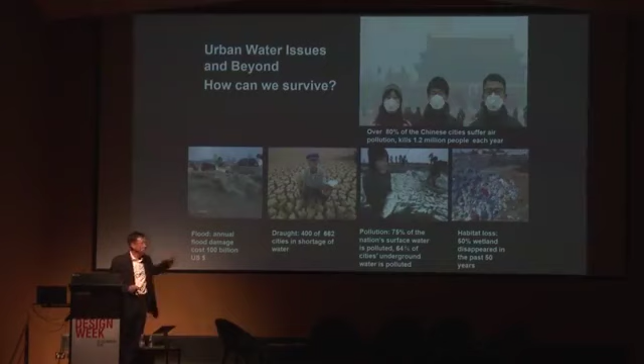75% of water is polluted. Two-thirds of Chinese cities are under the threat of flood. And again, these two-thirds of Chinese cities at the same time are under the risk of drought every year. So that's a problem. We have other problems beyond just water, but they are all related. So it's an issue of survival.

It's not an issue of beauty, not an issue of comfortability. It's about survival. But conventionally, we invest so much money, so much energy, trying to solve this problem by this kind of gray infrastructure, like I mentioned this morning, in Europe and particularly in China. In the last 4 decades, we consume 50% of world cement, 30% of steel, and 30% of coal to build all this infrastructure, to build all these cities.

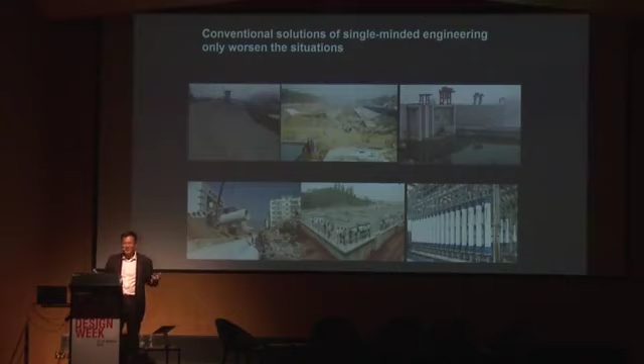And we say, I will quote, this is all from Western technology, industrial technologies. But we forget this - what we have built up in the past 5,000 years, the wisdom we have lost. We have forgotten the art of survival and the wisdom of living with water. And this kind of wisdom has been gained through thousands of years of experience of life and death.

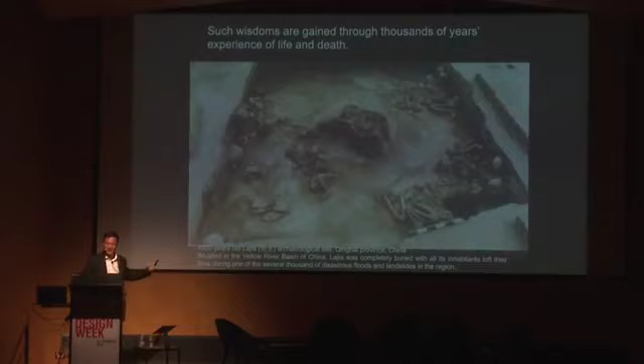This is just one of millions of these cases in China. 4,000 years ago, a whole village was buried under the flood, under the mud. The whole village. And at the moment when she, the young mother, was buried under the mud with her baby in her arm, she raised her head, calling for help. As we today, many still have the same gesture, calling for help, calling for God for help.

And this God was nobody else but the landscape architect, the planner. And as the planner, who was the first king selected or elected by the people, becomes the first king. He knows how to plan, how to divert water, and how to develop the city to avoid the flood, and select the right crops to grow at the right place. His name is Da Yu, the Great Yu.

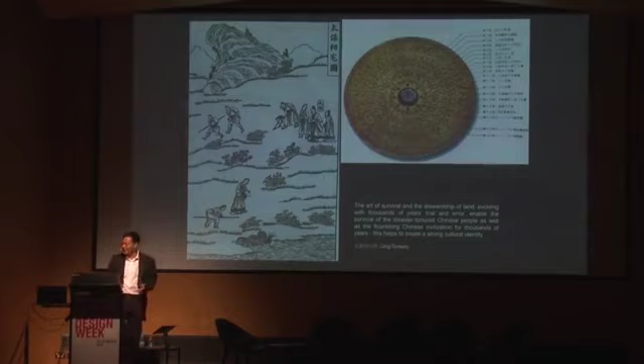And because of this, as mentioned, the life and death experience, we were able to invent all these technologies, including this compass. The compass in China was invented about 2,000 years ago, and never used for navigation. Today we use the compass for navigation, but the Chinese invented the compass for siting, for selecting the safe place to live. That's why the whole nation, the whole landscape in China was carefully planned and designed to locate where to allocate the cities, the villages, or even the tomb, the graveyard.

So that they can survive. Even in the Yellow River Basin, where the river in 2,000 years wiped out the whole China's North Plain, the Central Plain, all the cities were able to adapt to this kind of flood. So the cities are built in the water, or let water go into the city. Live with water, you can imagine, to be able to survive.

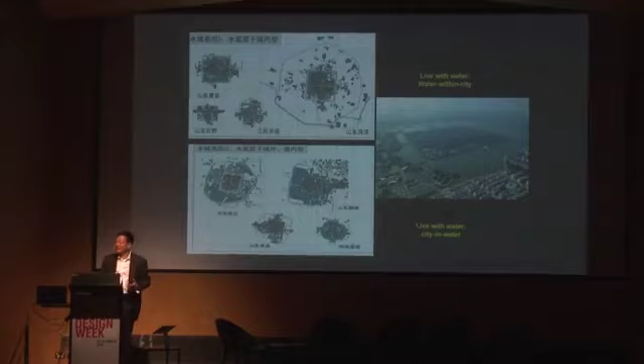And also because of such an experience, the knowledge being built up, we are able to build engineering, but prudent engineering, so that we are not offensive to the water, but at the same time able to use water wisely. So this is a system, all man-made.

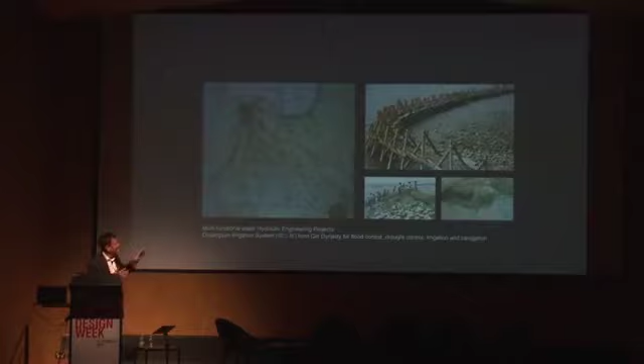I like the idea of designing nature, designing ecologies, designing. These are all designed. 2,000 years ago, the Chinese built this dike system, using very simple technology, bamboo and gravels, to divert water to irrigate the whole basin in Sichuan basin, and everywhere. This is in Shanxi province. You can see how the water is distributed.

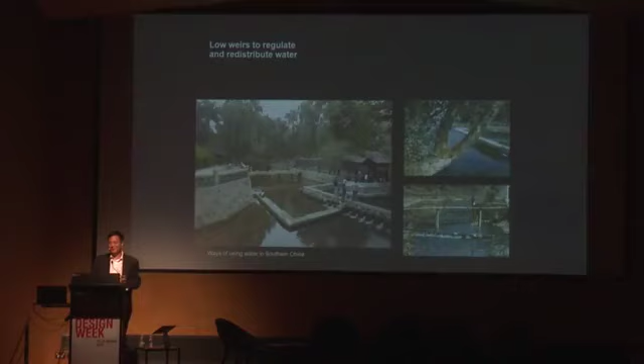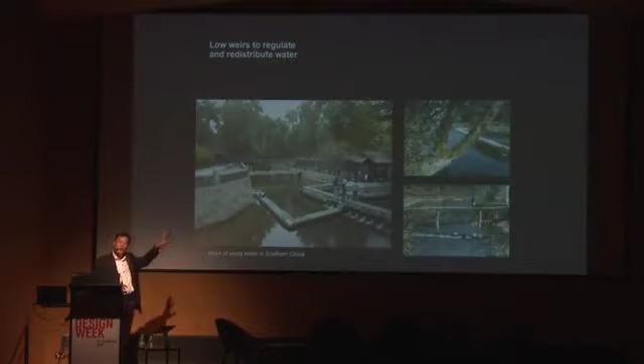Water is a meager resource in China. We have only 8% of global fresh water, but we have 20% of the population. So on average, China is overall in shortage of water. Here you can see how the water is managed, diverted, distributed equally among individuals, among the people.

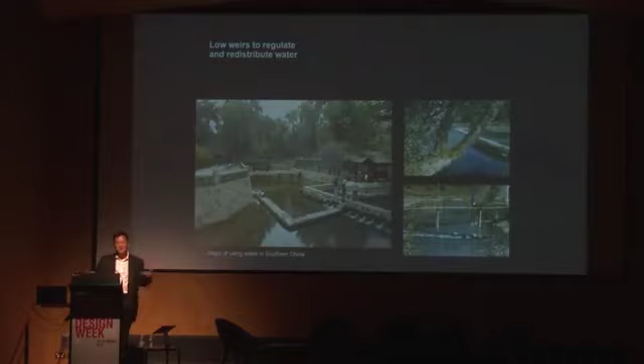And we have developed this whole peasantry, or farming skills. You can see how the water is retained, irrigated, used for irrigation, and able to be used around the season. We have monsoon climate in China, basically dominated by monsoon climate, so we have 3 months of rainy season, and the rest of the time we are in shortage of water. You can see how the water is retained, stored, and recycled. So it becomes productive. The whole landscape becomes productive.

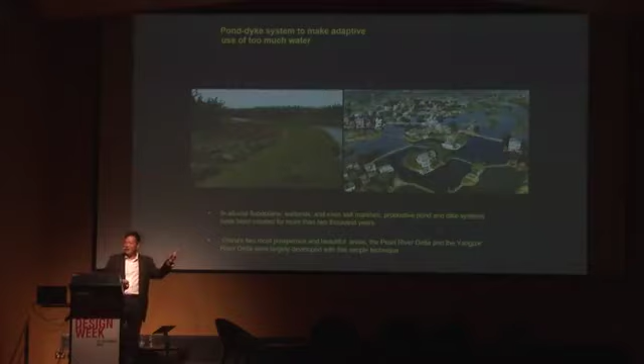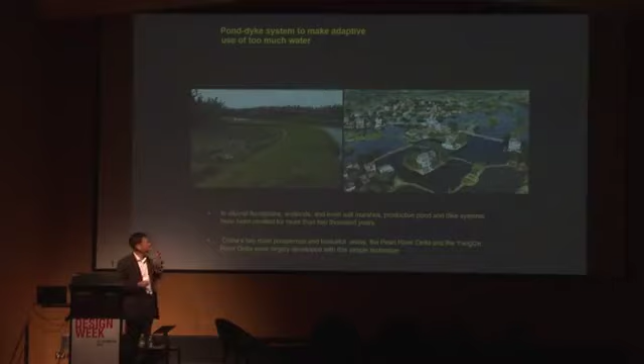Using a very simple pond and dyke system, we dug out the dirt to create a pond for fishing, for cultivating fish, and created a dike for mulberry, bananas, sugar canes, to make it productive and safe, secure to live with water, and to be beautiful. We also have the knowledge to carefully select plants. You can see dry crops, wet aquatic rice and bananas, to live with water and to rotate according to the season.

Monsoon season, grow rice. Dry season, grow sugar canes. It's adaptive to this kind of climate. And fertilizing - we developed this wisdom to deal with fertilizer, waste of human beings and domestic animals. This fertilizer goes back to the field and the whole village is cleansed through the process of fertilizing, so that the nutrient will not go into the water. This nutrient today we define as pollution.

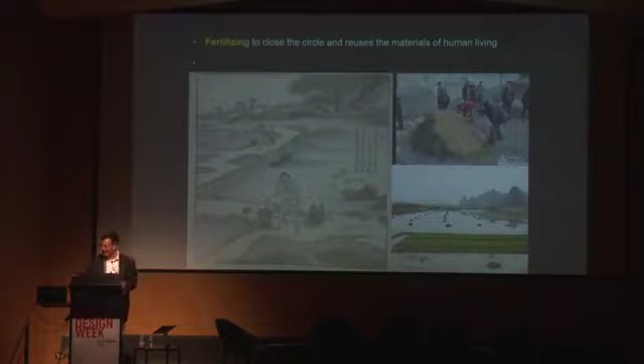So that's a story I remember from childhood of how we can solve today's urban problems, urban issues. So it's time now to revive and upgrade the ancient wisdom of living with water. Now that means we need to rebuild this solution, rebuild this system. It's a symbiotic solution to urban water issues.

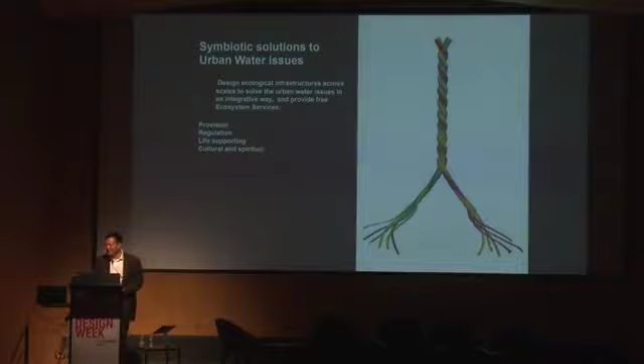Create green infrastructure - today all the speakers mentioned green infrastructure. Now, the green infrastructure is a structure. The key is a symbiotic, integrated, not monofunctional engineering solution, not a single-minded solution. Integration - that's the key, that's the key word, and that's the key for sponge city.

You can see the green sponge is basically building the green infrastructure. A sponge has no visible structure. Imagine the sponge is resilient, made of small, non-structural holes. So you don't see any connections, but deep inside, it's totally interconnected. That's the idea, and now it's being promoted nationwide by the president. You can imagine when the president says we're going to build a sponge city, what will happen. Right? That's a sponge city.

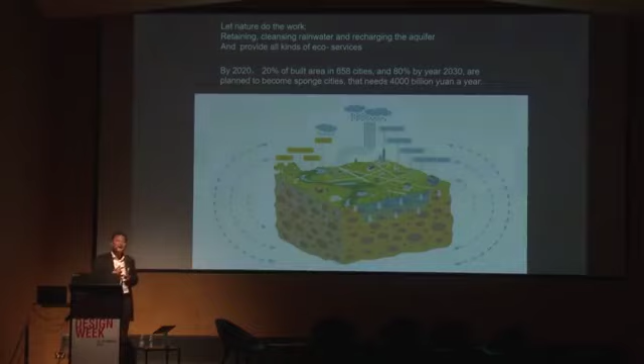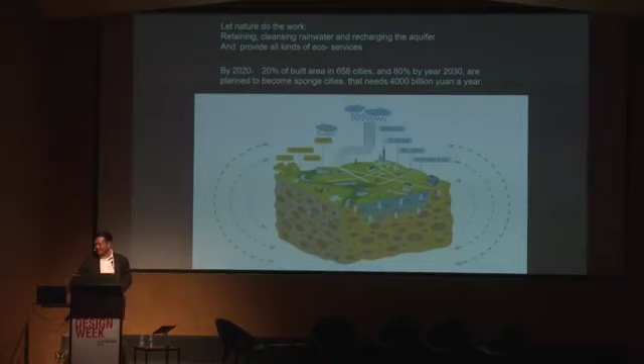Basically, 3 key meanings for sponge city: retention, cleansing - now that's important, cleansing in China is particularly important - and permeable, permitting recharge of the aquifer. That's the 3 key meanings of sponge city.

Myself is one of the first players of this keyword, sponge. This is a book, The Theory and Practice of Sponge Cities. And this is a system. I like the system, top-down system.

And we talk about bottom up. This morning we're talking about bottom up. Now, the first part I'm talking about top-down system because it's functional, it's very efficient, particularly in China. I remember the first landscape architect was the king. So if you become king, you'll be able to top down the idea of sponge city.

This in the past 20 years is a Turenscape project in China. In 200 cities, we're practicing for 20 years, and we built basically more than 1,000 projects. It's everywhere, almost everywhere in China.

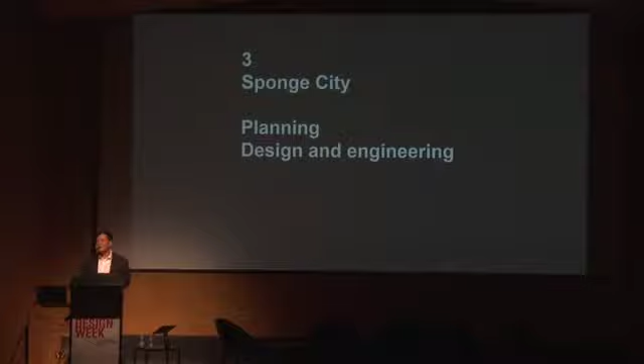But I want to talk about just 2 strategies. How can we develop the sponge city, not just in the city, but nationwide? As I mentioned, it's about the continent, it's about the globe, it's about the whole nation. How can you retain the water, keep the water, clean the water, and recharge the aquifer? Because we already destroyed the whole hydrological system, so we had to fix it, but fix it at national scale. This is across the scale - large, medium, small - rebuilding the ecological infrastructure.

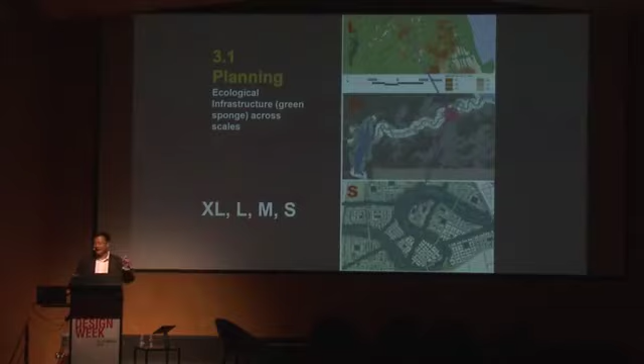So the first is planning. We need a plan tool to solve the problem. And this must go to the policies - the national policies, the city council policy, and certainly the provincial policies. Now this map becomes part of this national policy. We did research first to see how a national sponge system, I call it a national sponge land system, can be built into our national landscape.

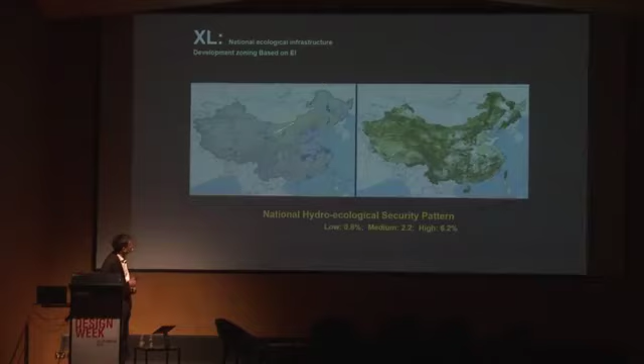Imagine the first map shows you that - look at this water system. We analyzed it, and we found that we only need less than 1%, 0.8% of the land to deal with annual flood. So if you just let less than 1% go to nature, to water, you virtually have no flood. That's annual flood, maximum, worst situation. We are talking about climate change - the worst situation, you only need 6% of the national land to give to the water. So that's a big picture. It's affordable - dealing with climate change or dealing with a national scale flood is affordable.

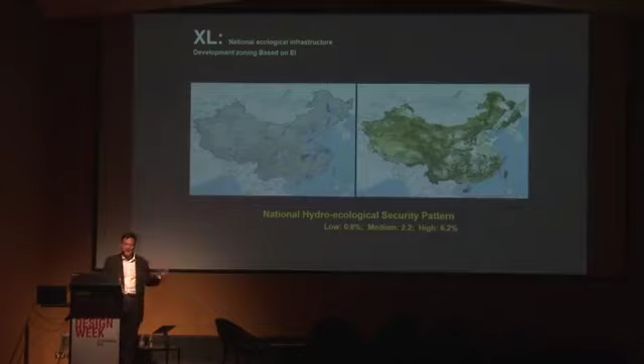So that's why we developed this national sponge system. All the dark green area is a red line - we call it red line. Now it's become national policy to draw a red line at national scale, which means you should keep those green spaces in order to keep the nation secure in terms of flood. And the light green is a resilient place - there's a place which you have to deal with water, it can be both, it's a kind of buffer area. So this is a national picture. You can see if you keep those areas, you can keep the storm water as much as possible, and you can avoid all the flood which we are fighting against with so much energy, so much concrete. We can be totally free if we can keep those.

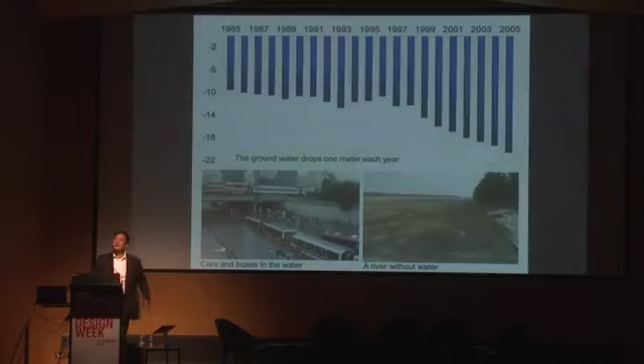At a regional scale, this is Beijing. In the last 40 years, Beijing expanded 7 times. You can imagine, Beijing expanded 7 times, and the groundwater dropped 40 meters - almost 40 meters the groundwater dropped. So all the rivers are dry. But the streets, you see, become rivers during the rainy season. It's very ironic.

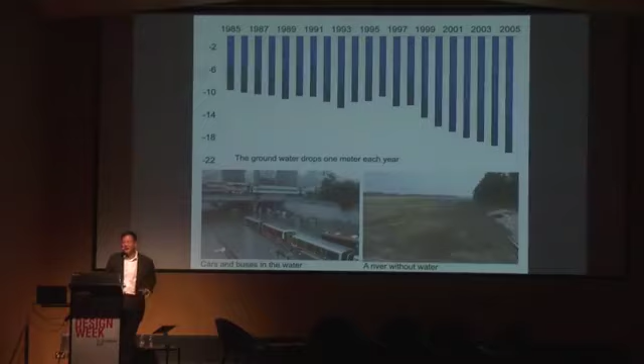And today, people are talking about building thicker pipes, storage tanks - I like that very much, thank you for the morning talk - because they want to learn from how the Europeans built the city, how the Japanese built the city. Under the city, they said Japan has a huge storage tank. So we're going to build a huge storage tank - totally a mistake. So we say no. Gray infrastructure will not solve the problem, particularly in the monsoon climate. That's why sponge city has been put on the table.

2012, 79 people died on the street in Beijing city, the capital, because of urban flood. People died on the street, in the cars, because of flood.

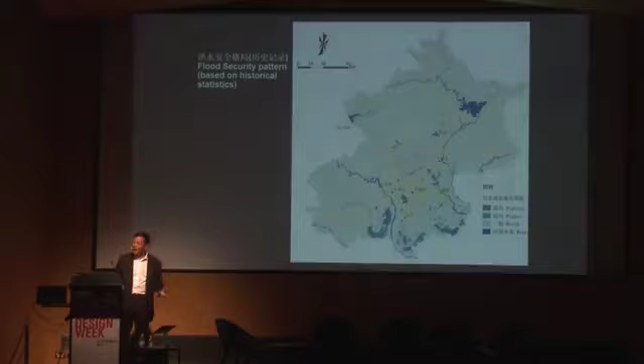So we analyzed where people died in these places, and historically, these places were supposed to be wetland, supposed to be given to the water. So the planning was done before the flood, actually.

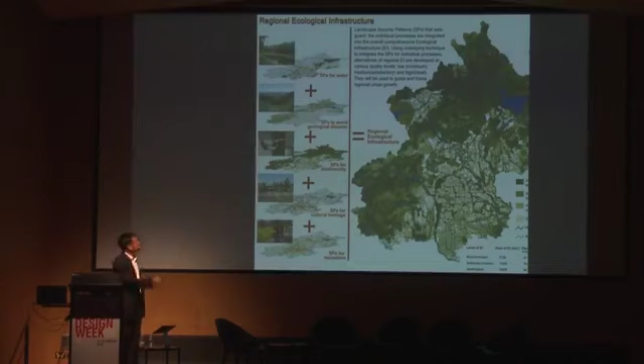So we did the sponge city concept, saying we need to integrate stormwater management, habitat, trail, bicycle system, pedestrian trail, and cultural heritage, and integrate them together to create this green infrastructure. Sponge city is not just about water. It's about an integrative solution to all these cultural and environmental problems in the city, including the pedestrian system, which should be integrated into this sponge system.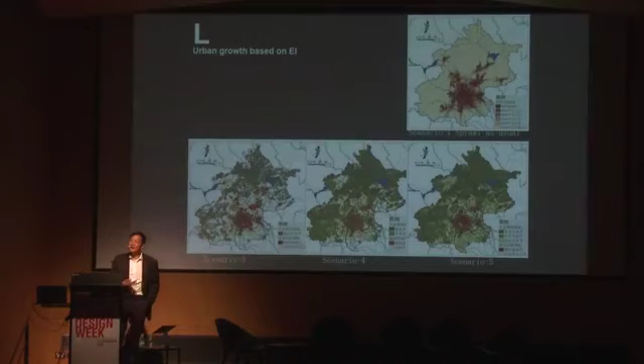So the sponge system is a resilient solution overall. Instead of exploiting the city like what happened in China in the past four decades, we propose that the city should be built upon this green infrastructure, or the sponge system.

At medium scale, now this is a built project. I want to show you this is about 10 square kilometers in size. It was designed in 2008 and built a couple years ago, and it's been tested by the flood.

So instead of following the conventional model of leveling the ground and building pipe sewage and drainage systems, we say that we don't need a drainage system. We don't need a pipe system.

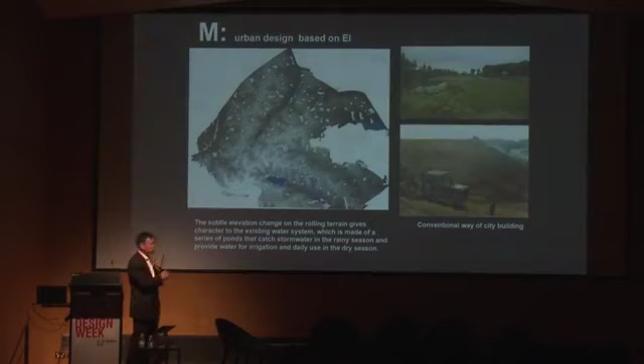Because look at this map, all the pond system is already here. Farmers did it. For 2,000 years, the farmers dug out all these ponds to regulate the drainage, the water system, in the monsoon climate — keeping water in the monsoon season and using it during the dry season to cultivate the landscape. Now that's the heritage.

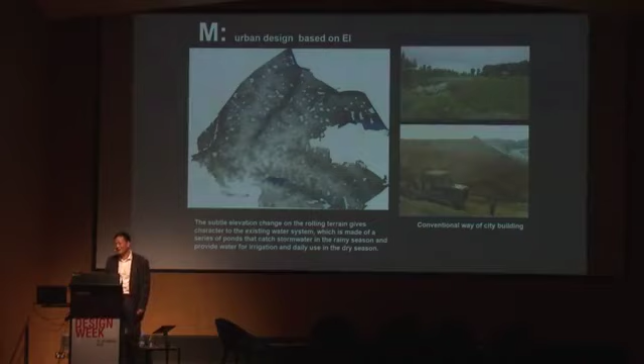So if you keep the heritage, you can virtually avoid all this urban flood in the city. So we integrate this into a new system, but based on the ecological or existing heritage system.

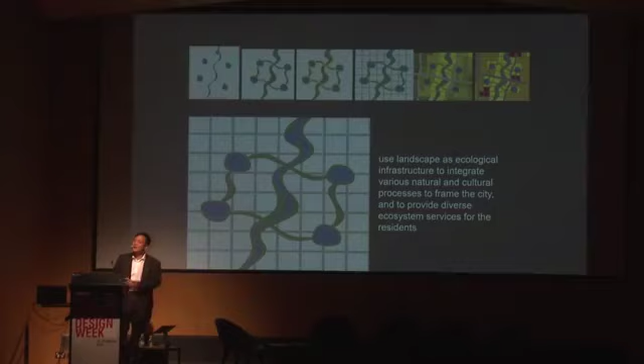So the existing ponds are linked with pedestrian greenway systems. I call it negative — we can reverse the whole process. Before you level down the ground, we build the green infrastructure first, then decide where to use the land for development.

And build the city without drainage pipes — no drainage pipes, only landscape as a drainage system. The first grade, the second grade, and this whole river canal system become part of the village, part of the city.

Back 2,000 years ago, the Chinese classics book about farming says that if you have 20% of the land for water, you will be safe, and you will get prosperous before you cultivate the land. Now that's the rule, based on the experience of farming.

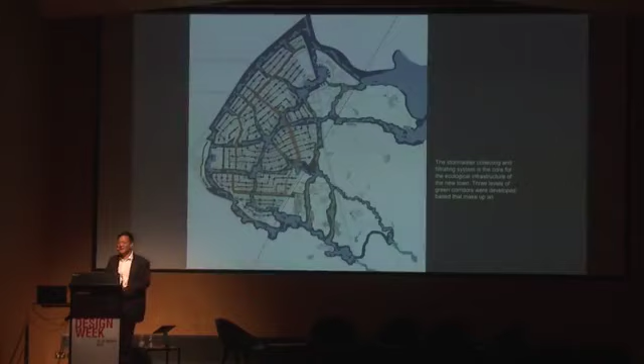And today the Chinese code says that the minimum green space in the city should be 30%. So we have 30% green space to allow you to build the sponge system. So we didn't cost more land, right? It's within the framework of the legal system.

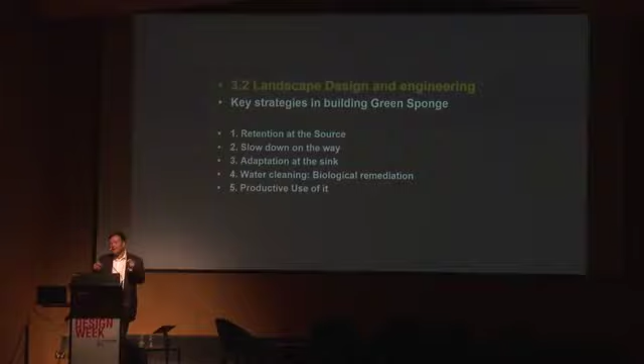No drainage pipe, and it was tested last year, because last year the whole city of Wuhan was almost flooded by this storm water, and this area was safe. We tested it. So again, it's ancient wisdom, but it's been upgraded and it solves urban problems.

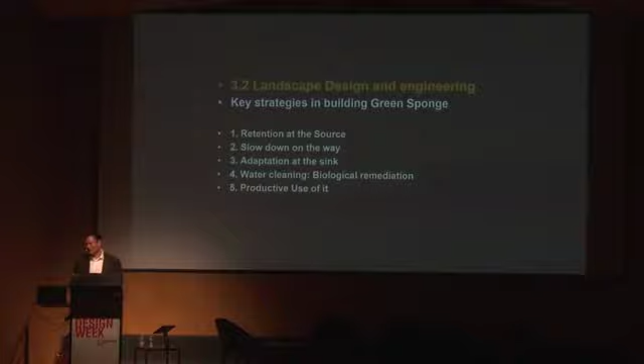Now that's about the planning. The second part I'm going to discuss is engineering, the design, and some key strategies in building green sponge.

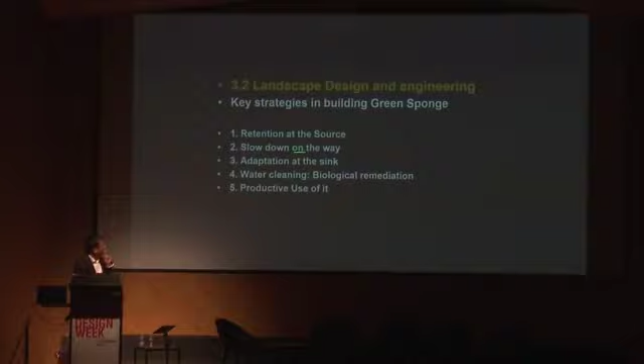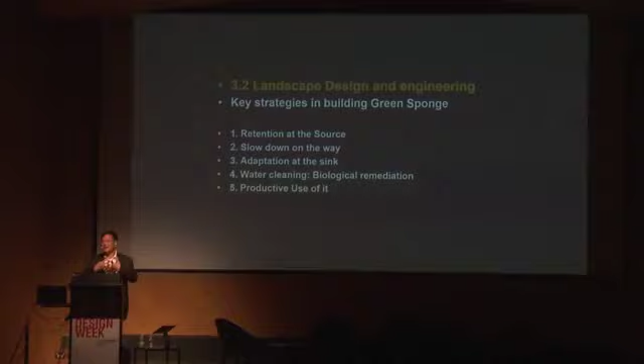Four points: retention, slowdown, adaptation, cleansing — biological cleansing — and productive use of it. These are integrative; they should be integrated, they should happen at the same time. So the first strategy, or first case, I'll show you how the green sponge solves the problem at the source, at the beginning. Create sponge in the city.

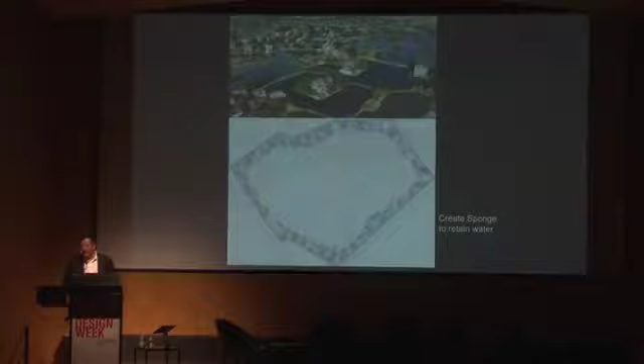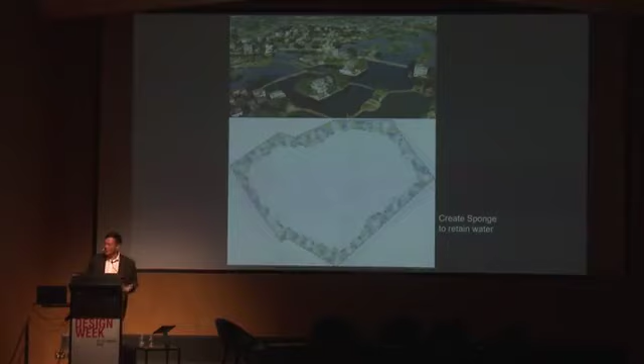Retain it. Instead of a piece of land, we just retain it, keep water, simple. And we learn from nature. As I said, when a marsh happens, you create a pond and a dike and create a really safe, secure sponge system. That's the land we have in Harbin in North China. It's about 33 hectares, a huge piece of land, surrounded by all this development.

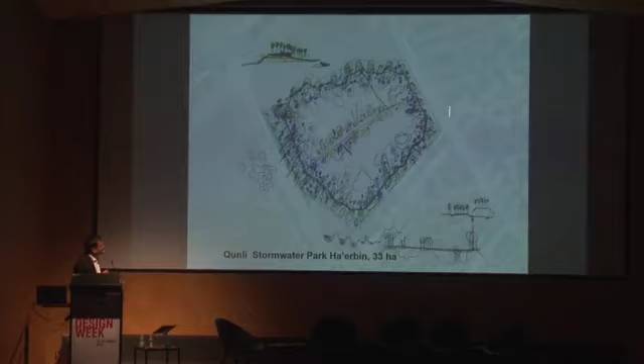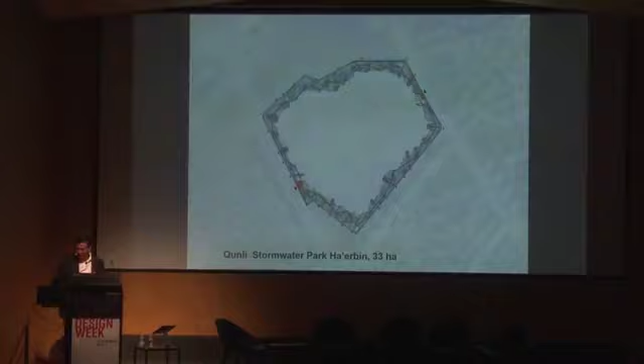They want to build a park. So what kind of park? This park, we say we need only do this periphery area, and they use cut and fill strategy. Cut and fill strategy, simple. And put people above it, and let water go into it. So it's a filtration process.

Cleanse it. So there's dirty water and clean water, and it goes into the middle. And we just leave the middle part, the lower part, alone. Like nature takes its process, nature works. So that's a map, and that's the rendering you can see.

That only needs one machine. It's simple, dug and piled. So we create this kind of landscape. Pond, mound, dike. So put a tree on the mound and let wetland plants evolve in the pond.

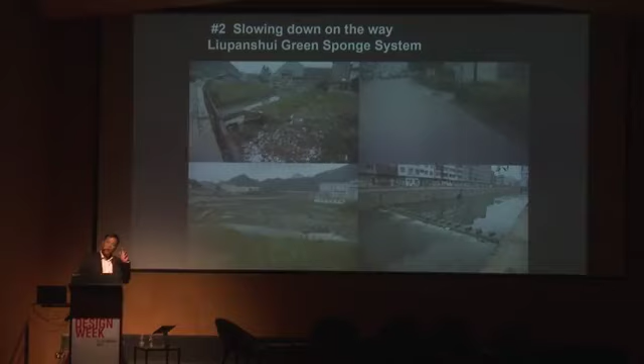So what about the second strategy? It's about the slowdown process. All modern monofunctional engineering tries to speed things up - you can see several cases here we discussed this morning. All speed up because it's easy to calculate, easy to build, and really functional, fast, efficient. But that's only one function, right? So we want multifunctionality, we want symbiotic solutions.

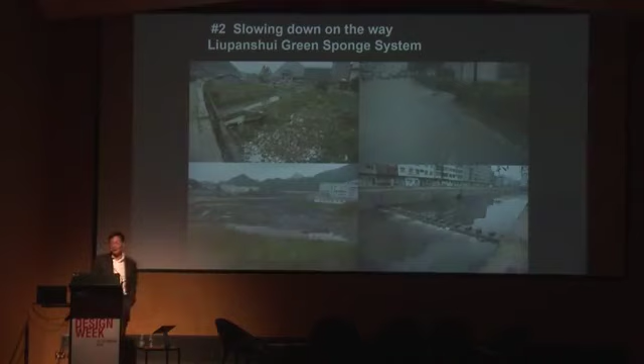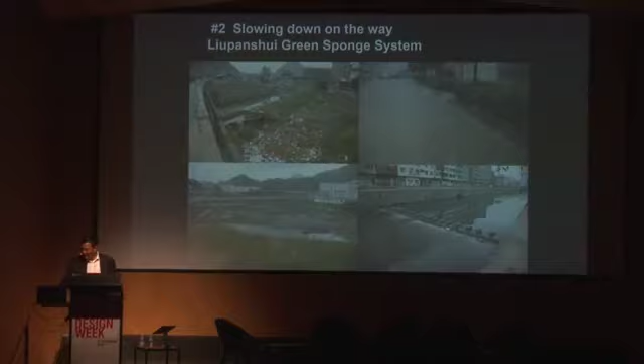This situation is in a city about the same size as Copenhagen, 6.6 million people in southwest China. Polluted, channelized river - you can see stormwater issues, wetland being destroyed. So we say that we want to slow down the water process, recover the natural system, but at the whole system level, including the rivers that run through the city. We recover all this drainage system, green it, and also put sponge wherever possible, wherever the water will merge, built into the communities. So that's the whole system.

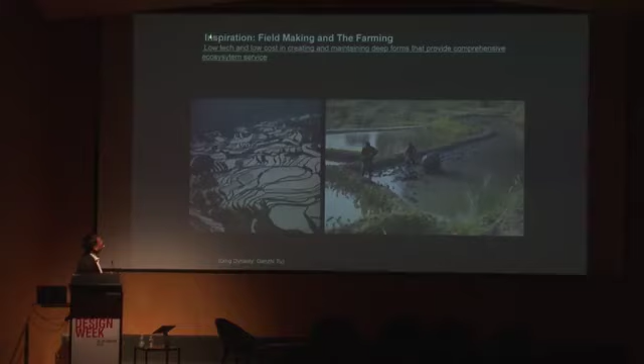This whole idea about sponge is to create a resilient water system, a hydraulic system, but it's a system. And they use very simple ideas, simple technologies, field making and farming. We learn from this - as I said, we know how to do it, and we can do it very cheap, very easy. It's art, it doesn't have to be precisely scientific. It's just common sense, and it doesn't have to really use any machine. It's very simple, yeah? That's the idea we got lost.

You can see, look at this globally. Southeast Asia, when you look at Mexico, when you look at any ancient culture, the whole globe's surface has been changed by farming, right? And this is a technique - it's so simple, cut and fill. Just cut and fill, using very simple energy and power, simple tools.

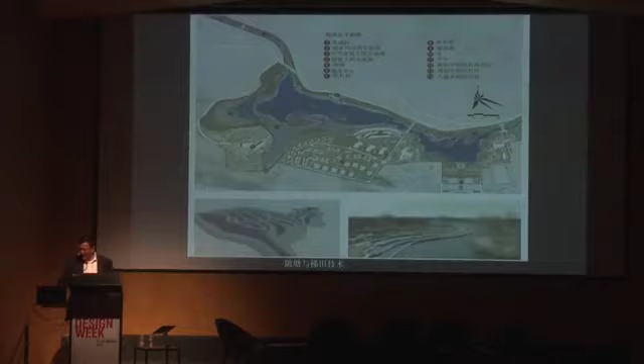So we learn from that, and create this terraces, pond and dike system, and transform this whole landscape in the city. Remove all the concrete - you can see that this was built based on this engineering idea. Speed up, so we slow down, transform - you can see, and fish come back.

It's just so quick - just 2 years' time, fish come back. And this was before also. Channelize the river system, speed up water, and we slow down again, turn the river into a pond system. This was before also. So speed up river, polluted soil and garbage dump, and we introduce this pond and dike system.

Connecting hundreds of ponds, turn the speed river into a slow wetland system, and we basically solve all the problems - pollution, retention of water, mediating and regulating water from monsoon climate to dry season. So we clean this up, you can see, and also make a beautiful park, used by thousands of people every day. So that's the second solution: slow down.

When you slow down, then nature will take over. Nature will have the opportunity to solve its own problem, to remove all the nutrients and to revive this habitat and the vegetation. So the third strategy is to adapt.

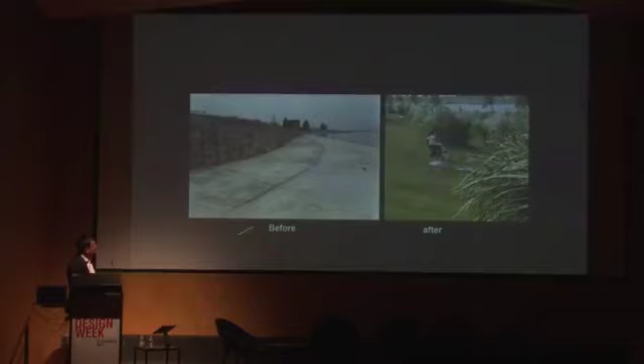I want to show you how, as we discussed this morning and afternoon, we have all these cases. This case is again based on the understanding of water force - 10-year flood, 20-year flood, 50-year flood. Nature doesn't need many places, right? As I said, only 0.8% for annual flood, or 6% for 100-year flood.

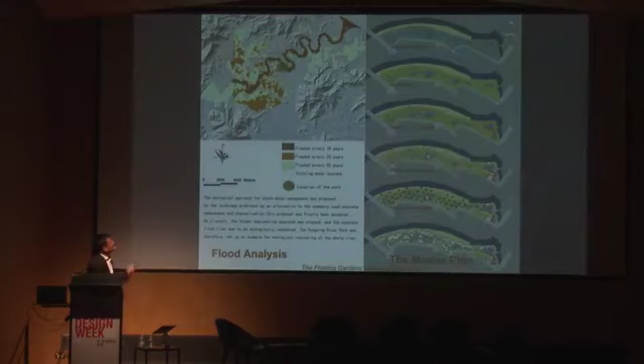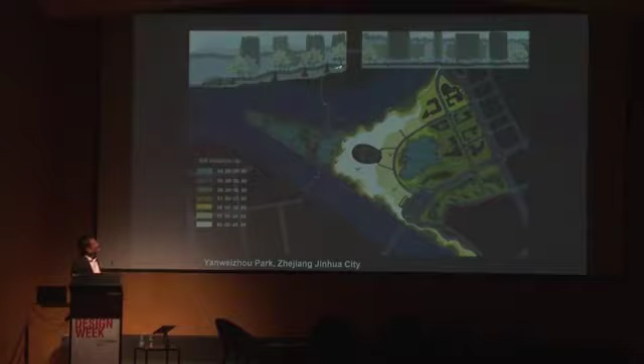So just let nature take over. This is a big river, we did this, and let nature come into it. This was before - a very, very well done engineering piece. Very well done, you can see, yeah.

But too dangerous, too dangerous. Hard - by the way, it's in my own home city, so they believe me, they trust me. So I totally removed all this concrete and then retreated. This will handle a 10-year flood, 20-year flood, 100-year flood, and this kind of retreat is learned from farming. As I said, my childhood was spent in this area for 15 years.

So I know how flood comes into my village. It's okay, we all get excited when we see flood coming, because the fish come to our fields, fish come to the pond, and you can catch fish. As soon as the village is above the water level, that's fine. So this is the idea - how can we design following the contour and following the water force.

And it's really been tested. You see, flood coming - this is a 100-year flood. It's just after the park was built, the flood came. So all the media got so furious, they said it's a park just built, why is it being flooded? You wasted so much money.

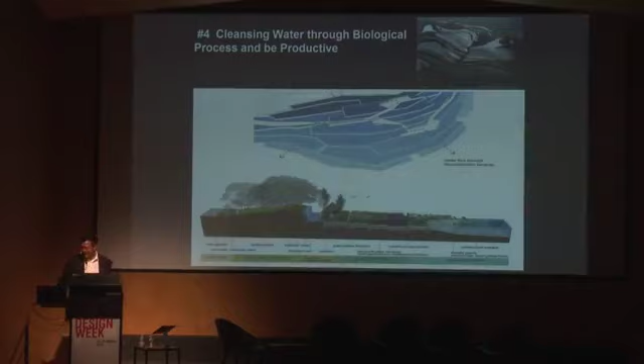Farming - filtering through the plants, we can clean the water. So by cleansing, we're actually producing biomass or a food system. That's a project in Shanghai - dirty water into clean water through a park. This is a linear park, 1 mile long. One drop of water takes 1 week to run through the whole process and come out clean.

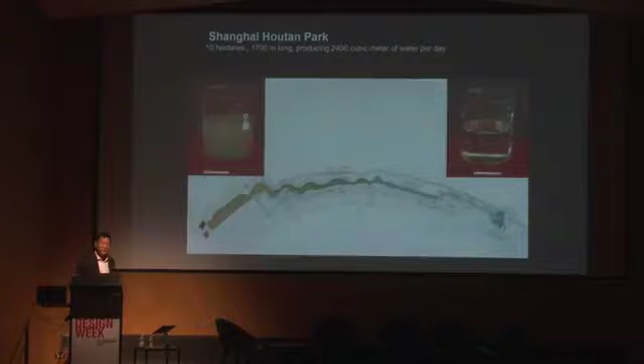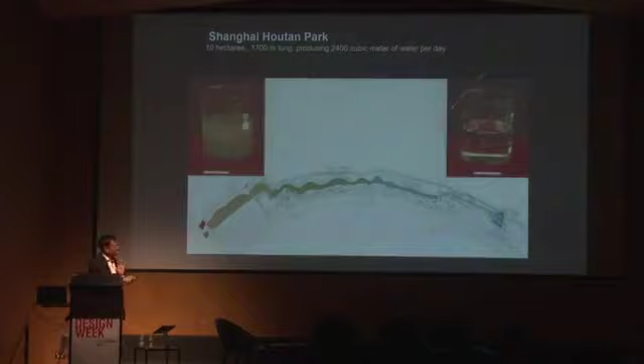Basically it takes 1 week, but daily it produces 2,400 cubic meters of water. 1 hectare of wetland, we tested, can produce 800 cubic meters of water from really dirty water, what we call 5th grade water, into swimmable, not potable but swimmable, clean water that can be used for daily use, for toilet, for watering, for swimming.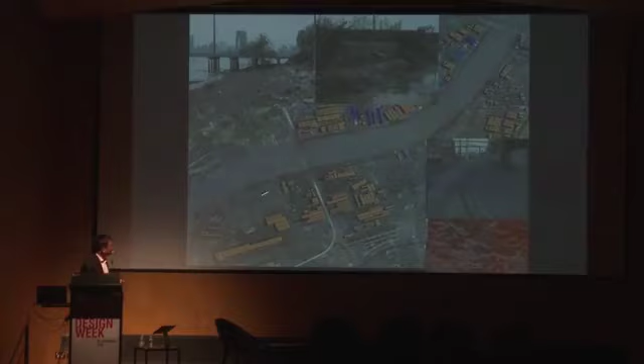So that was the site. This was 2008. You can see the site, Huangpu River. I think Adrian's project may be somewhere over there. So this one is during the Shanghai Expo, the industrial site, very dirty soil, dirty water, and also a flood wall. So we removed the flood wall and turned this into a 20-year flood zone, so that we can create an inner river, an inner wetland.

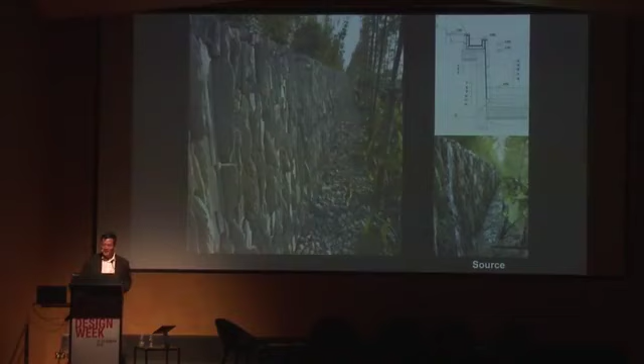So this inner wetland becomes the water cleansing system. This is a cascade wall, built for aeration, producing oxygen into the water. So a cascade fall creates oxygen. Now that's the wall here, and here is the filtrating process.

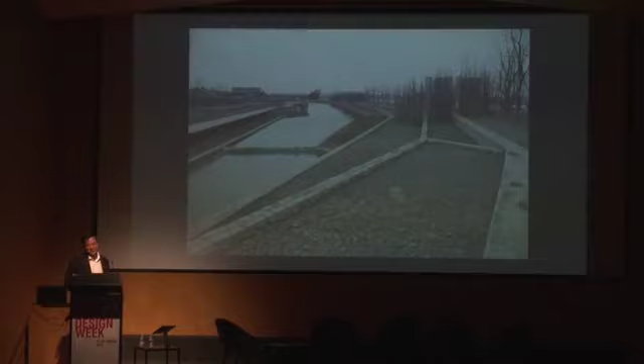So wetland terraces, man-made terraces, learned from farming. This was the process and build. That was the site before, and the terraces being built. We also wanted it to be educational, so the terraces were built so that people can see how different bands of plants can be planted here.

It's also testable. So we have 10 points for testing how the water becomes cleaner and cleaner. So that's some filtrating details. After 1 mile, the water comes out crystal clean. It's really touchable, crystal clean. And the whole process is productive and involves harvesting.

So you have to harvest the biomass. These weeds become animal feed, also used for fertilizer. It's also productive in terms of biomass and biospecies diversity as a site, and we tested it. So it's not only producing beauty and food, but also producing data. This data makes this case replicable and implementable at different scales, in different areas.

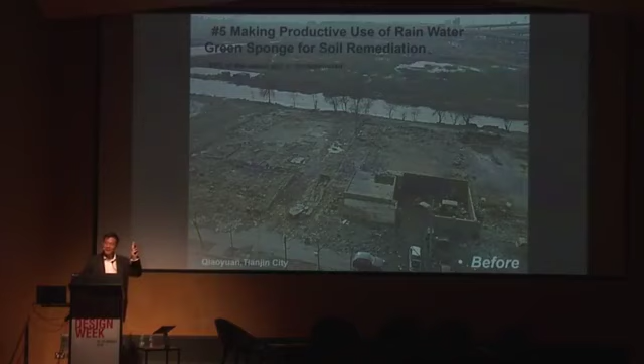So that's the fourth strategy, cleaning the water through the ecological or biological process. Now, the fifth strategy is how we can actually use water to solve other problems, including soil. As I mentioned, we have a really serious pollution problem in the city, and it's the soil. Two-thirds of Chinese cities have the problem of brownfield soil.

This is the situation in Tianjin again, heavily polluted, alkaline. Basically, it's just so alkaline nothing can easily grow here. But nature actually tells us that alkaline soil, if mixed with some kind of fresh water, can develop a kind of habitat, vegetation.

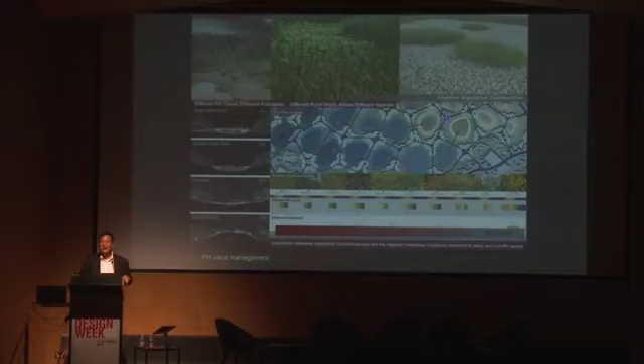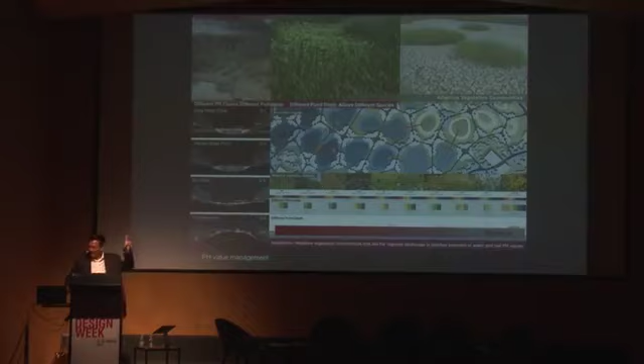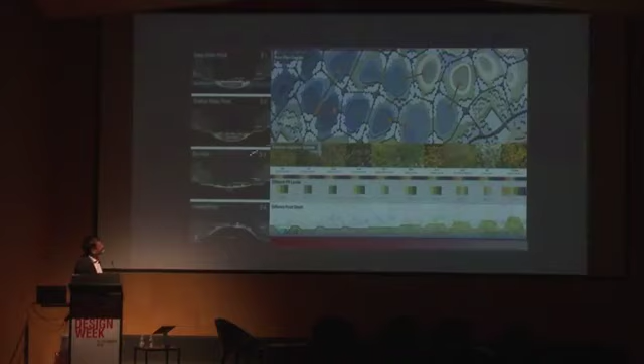So learning from that, we created this pond system with different depths, and it became an experiment. This was done in 2008. After the past 8 years, we learned that we can use storm water or rainwater, because rainwater is acidic, and the soil in Tianjin is alkaline, with a pH value of 9. So we can actually use the acidic water to mix with the alkaline soil and cleanse it, while also developing this spectrum of habitat.

And that's the process of building this pond system, using a garbage dump also. It was a garbage site before. 3 years later, you have this kind of landscape. It's a designed system, designed, but letting nature take over. Designed nature. Here in the winter, fall, you see the native reeds, native grass.

All this is just messy nature, but people love it. It's framed messy, not just messiness for its own sake. It's ordered messy. And we tested this too.

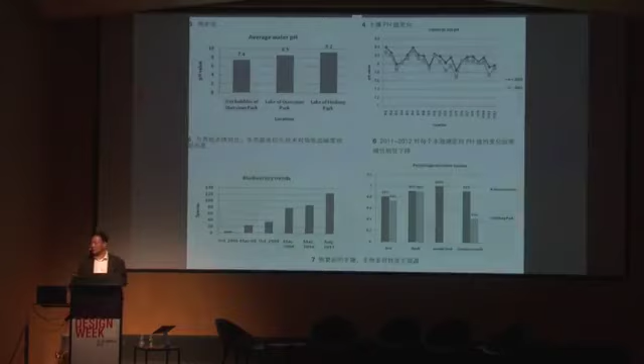My PhD students actually did all this research to see how, over the past 5-8 years, the habitat changed, how biodiversity increased, and how native species came back into the city. And finally, these strategies are all about retaining water at the source, slowing it down in the process, and adapting at the end, at the sink, to cleanse it and use it.

Now this is all a top-down system, beginning from planning at the regional or national scale, and executed all the way down to the urban level. Now what about bottom-up? This is a bottom-up case: my own home. I want to show you this, just to test that it can also work. This is a normal apartment building.

I bought this in 2009, and at that time, this was the balcony, the roof. So I bought the level. So the idea is how can we transform this kind of building, this kind of housing, because it's average.

In China, we have 50 billion square meters of building, and only 1% of those buildings are energy efficient. If we can transform this massive building stock into green building, we can virtually save 30% of energy consumption in China, and we can solve the problem of urban water issues in some part.

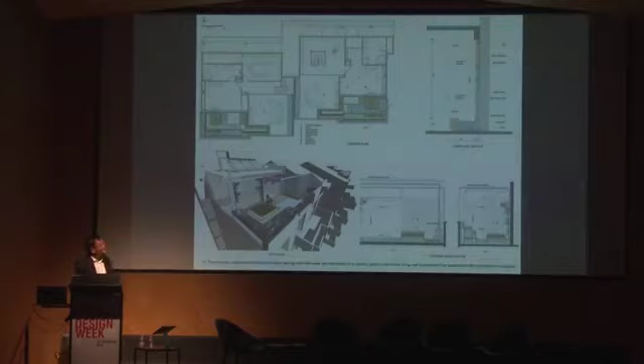You can see, so we collect stormwater and solar energy and irrigate the balcony and transform the balcony into a vegetable garden. And this water also goes into the building to create a living wall. The living wall will also function as an air conditioner.

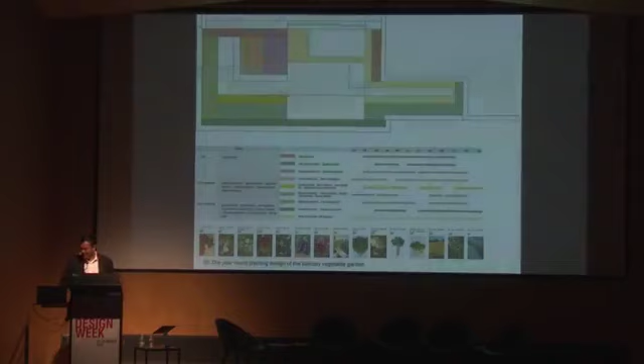So this is a process where, along the season, we grow all the vegetables that were built. Stormwater tank collected, and irrigate all these vegetables. Every other week, every other day, I have a plate of salad from this garden.

You can see that's fairly productive. And I also have a small ornamental garden. Here's stormwater, there's a gardenia, here's my bedroom here. So it's open to the garden.

And amazingly, you can actually let the water go into your living room. Now this is a living wall irrigated by the stormwater above it. It's recycled, reused. There's a water tank here, I mean a water body here.

And it's just a little small pond. And it's growing, it's growing. It's a natural takeover, nature takeover. Again, it's not those walls you're seeing in the airport.

Those are quite ornamental, you know, it costs a lot of money, a lot of energy. But this wall is very simple. It's porous, sponge, porous limestone.

No maintenance. The only maintenance is the pump and the stormwater collected. So this became an educational place. That's me, I give lectures to all the visitors because it's become a visitor center now. People come here to learn about how they can transform their building into a green building in terms of energy consumption.

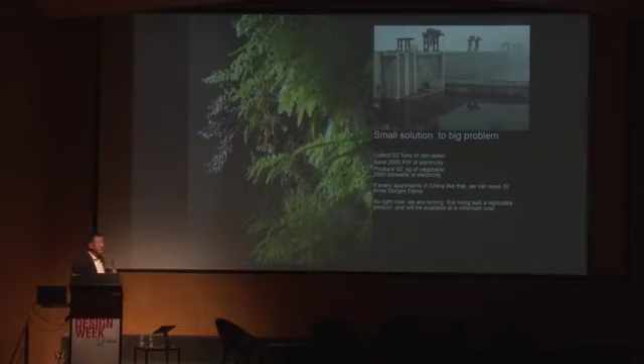So this is a small solution, a small change, but it solves big problems. These are all the data we collected from my own building.

So if every building, 50 billion square meters of buildings covering China, we can virtually save all this water system in China, all the river system. We can virtually demolish all these electric dams because they are so destructive for the water system in China.

So it's about a symbiotic solution. This symbiotic solution can begin at your home. It's related to air, it's related to energy, it's related to biodiversity, the habitat, and certainly the human habitat in the city.

So to conclude, after 4 decades of furious urbanization and industrialization in China, we are suffering serious problems. We run out of all ecological capital, such as water, and all this pollution, the problems as mentioned. So we need a revolution.

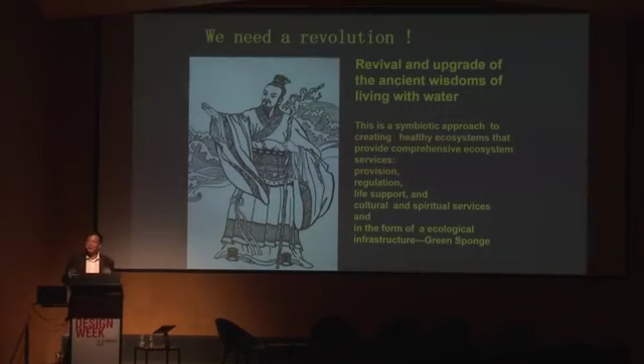The revival and upgrade of this ancient wisdom of living with water. This means we need to build a symbiotic ecological infrastructure to provide ecosystem services. So not just about water, it's about production, provision, regulation, life support, and cultural and spiritual aesthetics. We call this a green sponge system.